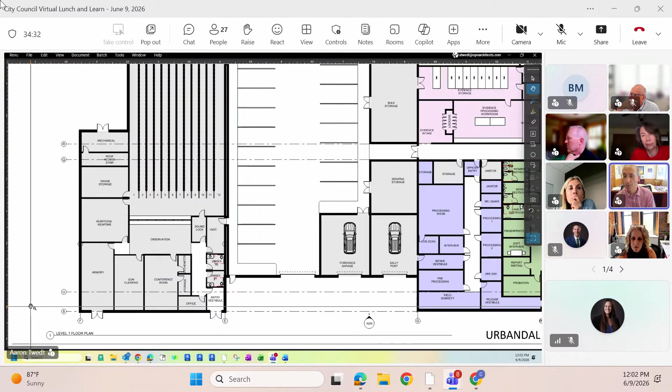My question is, can anyone tell us how the dimensions of the firing range compare to what we have now at the old facility? Yeah, Rob, help me out, is it 3 or 4 lanes currently? The current range is 3 lanes, 25 yards. Right. So it's double the length, so they can shoot long guns in it. And then with the 12 lanes, obviously that grows their capacity for the number of officers that can be training. This is also width that allows them to pull props and additional vehicles in for other training operations within that space, and is what's recommended ideally. Thank you. This size allows it to be a tactical range. So lots of good options. Any other questions on the plans?

Okay, we're gonna show you a couple of views of the building, primarily from the northeast and the southeast corner. These are the most visible corners of the building. What you're looking at right here is the southeast corner, where our main public entry is. Many of the things that we heard from you all in the visioning and aesthetic preference around wanting a building that's welcoming, that has a warm feel, that utilizes natural materials, and that focuses on landscaping that takes advantage of native plantings and keeps a natural landscape and feel have all been taken into account here.

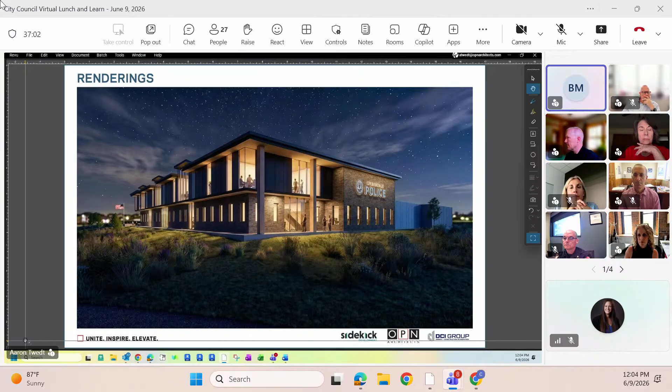Any questions on the images? So far, I really like them. When you showed the initial site layout, are we contemplating any public art on the intersection of 100th and Douglas? 100th and Douglas. It's a great question. We've not spent a lot of time talking about it, but I think that's absolutely something that could be accommodated in the future. Okay. Because I think it would be a really great place for something substantial and meaningful. Yeah, that's a great comment, Bridget.

On the other public safety facilities that we've worked on, the city's actually taken our plans and put out an RFP for local artists. You see that inside of Clive's facility, but Altoona has a big mural on the outside, and Waukee is going to have a piece out front. So they've been commissioning local artists. So we're happy to work with Curtis and David on that. I'm not sure if Jan's on here, but I'm sure she'd jump at the chance for a public art venue. Okay.

I just had a question because when we did the visioning earlier, these are just absolutely beautiful images. There was some concern expressed about windows. And I just wanted to make sure that's all been taken into account and that we're feeling like this is still a safe facility for the people inside. It's absolutely beautiful. It's a great question.

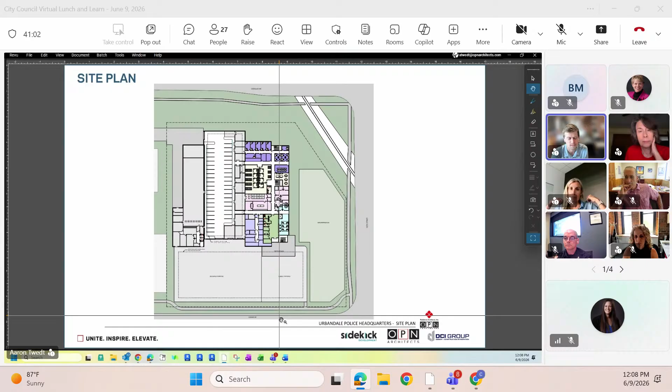So that image that you saw of that front entry is between 60 and 70 feet wide. Yeah. Gives it some nice visual presence for public who are approaching the building to be able to clearly identify where the entry is and where the public portions of the building are. Oh, that's very nice. Thank you.

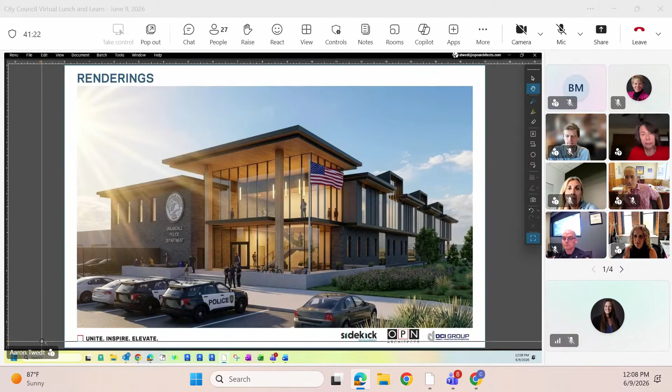Okay, I think with that then, Aaron, we'll keep moving. We did want to talk about a couple of the specific sustainability features from our session with you all. Again, we at that point in time talked a little bit about how we use the framework for design excellence and the 10 basic overall categories that kind of capture all the things within that. We asked you to help us prioritize the things that were important to you.

And at that point, you helped us identify the fact that how we could look at energy savings was incredibly important, how we think about a high performing building as far as the building envelope was important, and then many of the site aspects were important to you. So those, again, you've seen some of how those are being incorporated in the images, but we've got a list here on this next slide that also goes through all of the different facets that we're taking into account.

So I referenced the detention pond and stormwater management on site with native plantings. We're also integrating lighting and thermal controls for the facility, as well as, we'll talk about when we get into costs, geothermal and solar options, as Curtis was also referencing at the beginning. We are showing the potential for EV charging and pedestrian bike racks at the front of the building. We've got access to daylighting and views. That's important for and related to wellness. That's lower on the list.

We are incorporating a storm shelter in this facility. And then we're trying to maintain connection to outdoor spaces in a variety of locations around the building for the officers. We've talked about how we're accommodating future growth, looking at material efficiency and use of natural materials. Some of that material efficiency just comes in how we detail it and bring materials to the site.

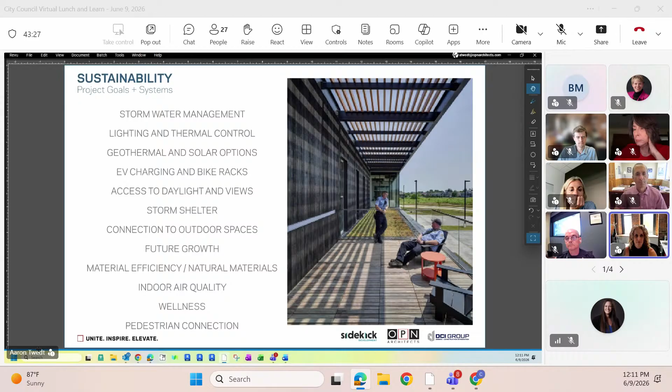And then we also take a hard look at indoor air quality. So how we designate specific zones within the building to capitalize on making sure that we're controlling the quality of the air that the officers are breathing. And then last but not least, wellness, and of course, the pedestrian connections in, around, and through the site. With that, I will kick it over to Michael to go into our cost review.

Hey, good afternoon. So Michael Steen, DCI Group Vice President here. I've got Adam Byrne on as well. He's our Senior Project Manager on this. Previously, we had introduced Nick Bruck. He's our Project Executive. He had a conflict today, so he was not able to make this.

What you see in the package here, if you want to click to the next slide, we've got 3 different budgets put together here for a few different options that I wanted to roll through with you guys. This first one here is kind of what we're considering the base budget. The difference between the 3 really comes down to the mechanical systems, how we're cooling and heating the space, and then the electrical system, how we're providing power to the space. So this would be a more conventional commercial system for the HVAC, as well as just the typical power being provided from the utility provider.

So this budget reflects a hard cost. What we call hard cost is really all the direct construction items that go into the project, the stone, the brick, the steel, all those things, of roughly $40 million. And then we have some costs below the line, which are everything else that goes into building that. We're continuing to carry some contingencies. So we have a design contingency that we carry at this stage in the project. As this is still pretty early on, obviously decisions are still being made. We're still fleshing out items on the site as well as inside the building.

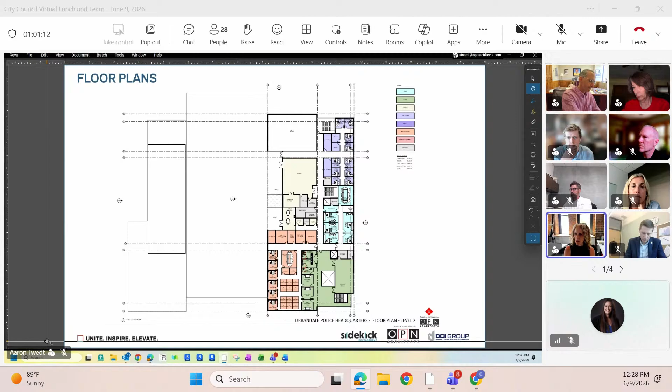So when we talk about growth and flexibility in facilities like this, where we're planning for an extended timeline, 40 years, we like to look at it in several different ways. One of those is through building flexibility into the facility as we build it so that it is sort of future ready, we call that future proofing, if you've heard that term. So that we've got spaces that are flexible, they can convert from one use to another use. A good example is maybe a small conference room can convert to an office or vice versa. That's one way we handle it.

We also build some growth into the spaces themselves. So there may be some additional either office or conference spaces that we know are planned into and built into the build out on day one. And then the furthest reaching level or layer of that is something like what we've done here with the shell space, which basically gets us out beyond the point at which we can predict what might happen, but allows us some flexibility to be able to utilize that space in some way in the future that we just don't know today.

Perhaps this is a question for the chief, but just trying to understand how we came to the conclusion that 40 years out, we'd be looking at 100 officers. Just wondering what kind of calculations we did on the growth of our footprint and its population, or whatever we may have done to come to that conclusion. Yeah, I can speak to that a little bit. Can you hear me? I haven't spoken yet today, so let's make sure everything's working.

We do a calculation now by population, that's how we figure out how many officers we need, and just as a side comment, we run that very lean compared to others. We extended that out to that 40-year time frame, and then we actually took a few officers off the top of that. Using the calculations that I normally use, I think we were probably like 110 if I remember right, but we dropped that down to about 100 because we think technology advancements and things like that will help efficiency and effectiveness in policing, so you're probably not going to grow as quickly as we have in the past. So that's how we came up with that 100 number for 40 years out.

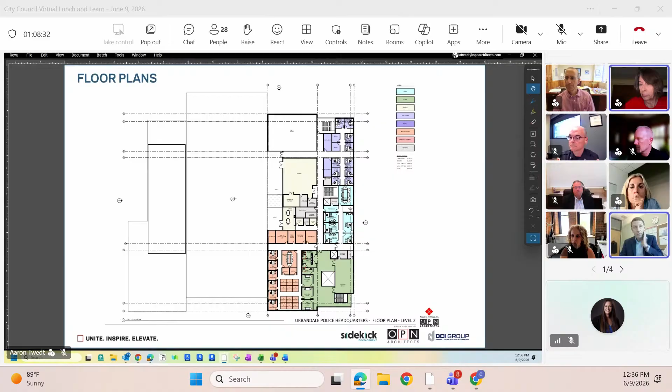Are there any other questions or comments from mayor and council members? Yeah, David or Curtis, what decisions will need to be made for purposes of the bond referendum? So one of the next things that'll come to the council table, Joe, will be the approval of the ballot language and moving forward with that official language, and then setting the date, obviously, on November 3rd. So that'll be the next big step that comes to the council. Will we need to identify one of these budget figures?

Yeah, exactly. So maybe I'll just mention some points now, mindful of the next item on the agenda here too. So city manager's office and finance department will follow up with a detailed memo that explains all of the financing path for the project. It's more detailed than we would want to take just over this lunch and learn, but we'll follow up with a memo. What we're doing is really focused on providing value in the project, so delivering as much utility for the department and community at a price that's as efficient and reasonable as possible for the community members.

And Finance Director Nikki Lamb has worked with Travis Squires, our financial advisor at Piper Sandler, and they've developed a model that could finance the basic project you saw with the geothermal inclusion without a need to raise the debt service levy. So that's a very important model that they were able to come up with. That would not be inclusive of the full solar array, but the basic project with the geothermal, there's a way to get to that without raising the debt service levy.

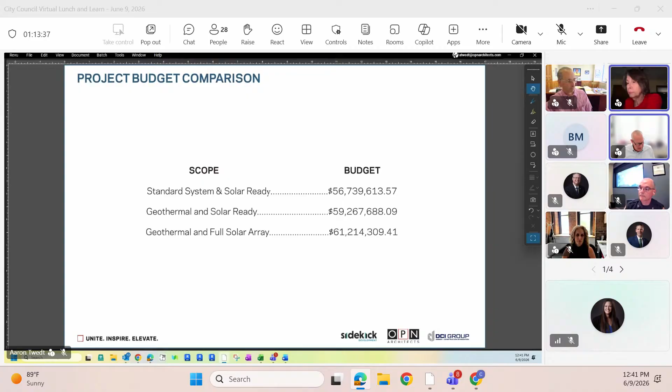Then we will move on to item 3.2, which is the watershed management plan presentation. So, Kristen, are you going to handle that?

Yep. Good afternoon. Curtis, do you want us off of here? Sorry. Are you done with us? You are all free to go. Thank you. We'll follow up on the follow-up. You can stay, Angie, if you want. Probably. I might learn something about the watershed projects. I wouldn't be opposed. So, all right. Thanks, you guys. Thank you, everybody, for your time. Bye.

All right, good afternoon, Mayor and members of council. About a year and a half ago, the Polk County Soil and Water Conservation District offered to do some free floodplain management assessments, particularly for the folks in the Walnut Creek. And so we took them up on that offer, and Cassie Jewell and Robert Austin from the Polk County Water Resources Group are here to present their findings and what they developed for us. If we've got a little time at the end, I'll give you a real quick update. Some of these projects we were also developing on a parallel track, and I've got a few updates for you on some stuff that's already in progress too. But I will turn it over to Cassie and Robert to take it away.

Thanks, Kristen. I want to make sure, first of all, can you guys see my screen? Okay, excellent. So good afternoon, Mr. Mayor and council members. I want to thank you all for your time and the opportunity to share our Urbandale Walnut Creek floodplain assessment. We're excited to work with you all to expand on the progress you guys are already making on some of the stormwater management that Kristen was just talking about.

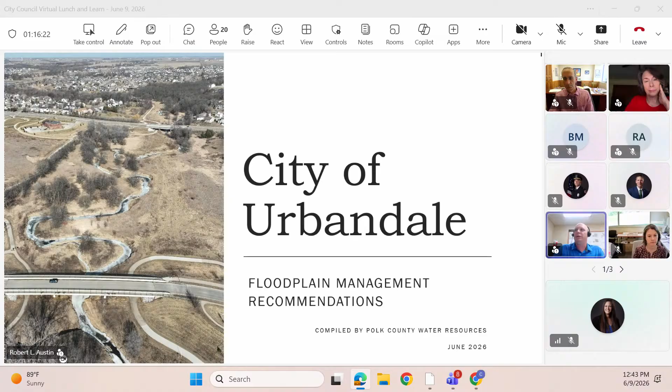Cassie Drewell, my partner in crime here, is the outreach coordinator for the water resources team. We're going to walk you through this pretty quick here. We're just going to go over how we kind of got to this point, some of our findings, and some of the opportunities we will have moving forward. Okay. So I'll begin with a little bit of context.

Urbandale is a member of the Walnut Creek Watershed Management Authority, and over the last couple of years, that WMA has been working on a 5-year implementation plan. And through the development of that plan, there were 5 goals set for each of the member communities. 2 of those goals are much more quantifiable than the others. So those are the goals that we kind of concentrated on when building out this assessment.

Goal number 1 is holding water on the landscape. And goal number 2 is the restoration of floodplain acres and or linear feet of stream restoration. So for the city of Urbandale, there is a 5-year goal of 25 acre feet of water storage on the landscape, and to restore a combination of 80 acres of floodplain or about 6,500 linear feet of stream.

I would like to thank you all because you were the first community who has allowed us to do this assessment. You guys were one of our targeted cities because of the impact you guys have within Walnut. So you guys helped us kind of generate a model moving forward that we'll be able to use for some of these other communities. So thank you for that.

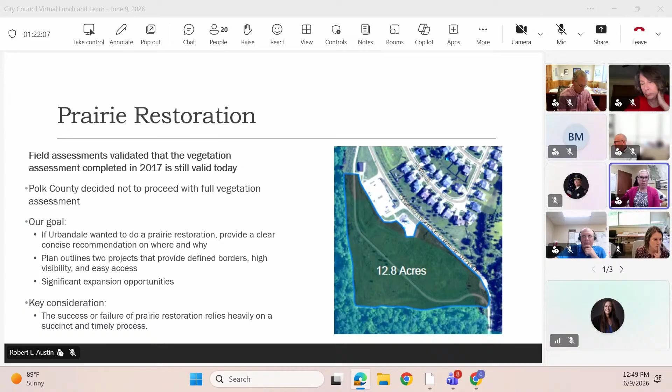We also talked about woodland restoration. So this is also at Walnut Creek Regional Park. Urbandale has a really nice stand of woodlands that we have documented, I think, back since the 30s when we had the aerial views. This woodland area was still there, and it's still almost the exact same size as it was in the 30s, which is really cool.

And within that, there was another study done by Drake University that's just wrapping up, where one of the professors there has done a vegetative assessment and identified some rare species in this woodland. So that is really cool.

And so with a lot of woodland areas, especially in central Iowa, the invasive honeysuckle plant has a chance to drown out some of these native and special plants because of their aggressive growth. They can shade out a lot of different plants, as well as they're not great for stormwater management because they have shallow roots and can contribute to erosion if we get large rains.

So a great recommendation would be to restore these woodlands by removing all of that invasive honeysuckle and allowing the canopy to be opened up a little bit. So you'd keep the majority of the nice big oak trees, but get rid of those understory brush honeysuckle. And that allows some of those spring ephemeral plants, as well as some more plants that are suitable for a woodland understory to come through.

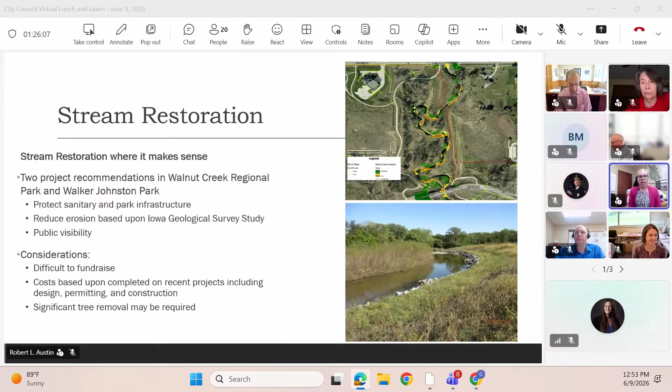And if you let that go for too long, sometimes it can damage infrastructure, such as sanitary lines or maybe roads or bike paths. And also with these, significant tree removal may be required in order to do some of these restorations. So that's something the city would have to keep in mind too. All right, and I will let Rob wrap it up. I'll do one more slide, sorry.

So then we have holding water on the landscape recommendations. So these are the larger types of projects like wetlands that can hold a bunch of stormwater. And so that's great for communities downstream, but also these special types of wetlands can do a lot of managing pollutants as well. So there's a variety: stormwater wetlands, pumped wetlands, which includes pumping water out of a creek through a wetland system and then dumping it back into the same creek. And the wetland allows filtration of pollutants.

And then oxbows. You already have some oxbow restorations at a couple of your parks. And so just making sure that those stay full of water so that they can do some nutrient treatment as well are recommendations that we have in this plan. All right, Rob, I'll let you finish up.

And I get unmuted. All right, thank you, Cassie.

Yeah, so one of the things that we are offering to some of the WMA members are our watershed services. Those could be anything from helping out with fundraising for projects like this, grant writing for projects like this. We can help with engineering oversight and design oversight, construction oversight. And recently we are adding vegetation establishment and management to our services that we're offering to some of the WMA members.

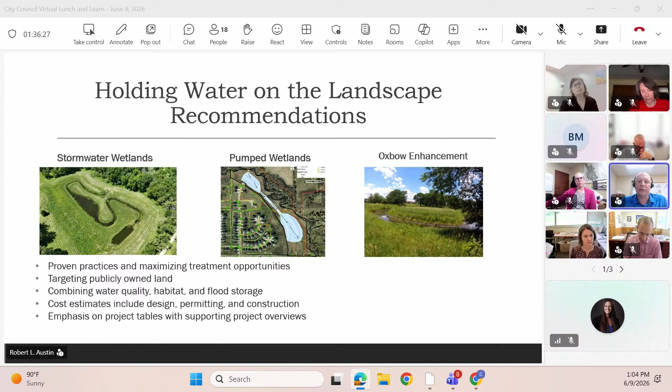I wouldn't say necessarily a priority. There's some lower hanging fruit we believe is out there. Let's see if I can get this to go back. There we go. I know Cassie talked about the Oxbow enhancement. We think that would be pretty low hanging fruit. We think we could get pretty good funding from IDALS. Basically, the hole's already in the ground there. We would potentially install a small solar pump that keeps water moving through that oxbow, passively cleaning out any sediment or nitrates flowing through Walnut. So I think that's a pretty good low hanging fruit that accomplishes some good goals.

And then also, like Cassie mentioned, the woodland restoration is something we think is a really unique ecosystem for the Des Moines area. It's an oak savanna that's been there for hundreds of years probably. We've got aerial photography going back 100 years that shows a pretty similar shape and acre size to what we're seeing now. So it's been pretty untouched other than the invasive honeysuckle running rampant on the understory, which is not allowing any more oaks to have any sunlight or any of those native plants that Cassie was talking about.

They're getting choked out with some of that honeysuckle that tends to grow very early and drop its leaves very late. So it's a tough plant to combat, but we're working on it throughout the county as we speak. So I would say those are two pretty nice low hanging fruits that would be the best bang for your buck.